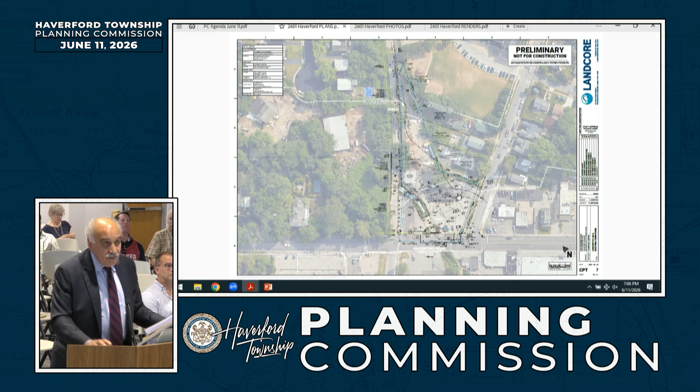First thing I'd like to show you are the pictures of the current property, and I'll take you through them real quick. That's the back. This building is coming down. All this equipment's being removed. The trailer's being removed - if anyone wants to buy one of the cars, if they're still there, they can. Most of these cars, I think some have been removed already, but you've got dumpsters, storage trailers, debris - this stuff from the current tenants. This is what we currently have in the back.

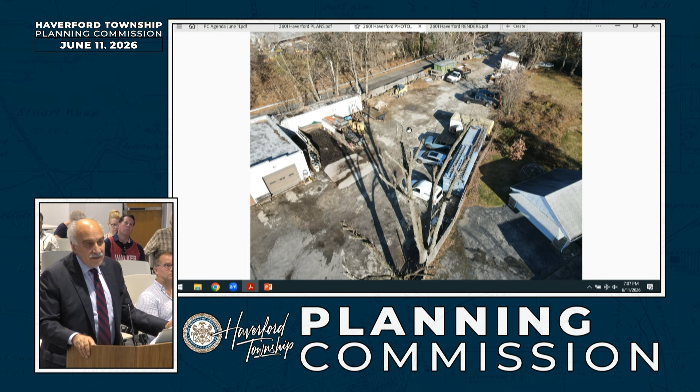More aerial pictures, and you'll see the irregularly shaped triangle - Alex will talk a little bit more about what we're going to be doing there. This is all going to be green. There's going to be trees, skip laurels, and grass. This is going to be a really nicely done up part of the tract. In fact, this client's going to be dedicating about a third of the property to open space. So contrary to what you see here, this is going to be beautiful, clear, nicely vegetated open space.

The improvements being made primarily consist of installing a permanent canopy, and I'm going to let Alex run through that. Right now there is a canopy that just sort of hangs there - I don't know if I had a picture of that. It's not a very secure canopy.

There you go, this is what we have there now. It's a temporary canopy, but it's going to be a permanent structure. It's primarily designed for the safety of the employees, shielding people from the sun glare.

It's an overall safety improvement. The directional flow of traffic on the lot is going to change, so it's a much safer approach to the car wash and exiting from it. There'll be less traffic backing up. It's a really good solution.

I'll let Alex do that. So let's talk a little bit about what we've done so far. We've gotten zoning relief from your zoning hearing board.

We are allowed to construct and develop in the floodplain, and to expand the non-conforming use, because that's currently a non-conforming use in the district. We're also permitted to have structures within the front yard setback area, primarily the vacuum cleaner stanchions that are going to be put there. So we did get zoning relief.

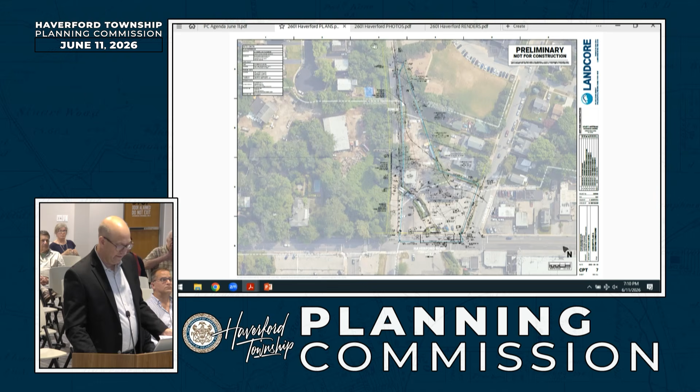Alex Tweedy with Landcore, civil engineer for the project. Just to clarify more on the circulation improvements, we can run through the site plan. Kirk gave a pretty good explanation, but really the business and building are staying almost the same size as today. There's a small addition to fill in one corner, but no new buildings being constructed. As noted, we're replacing the temporary canopy with a permanent one.

But the most important improvement from a traffic perspective is that currently you pull off Haverford Road and go right into the tunnel - there's only room for about one car to queue. The main purpose of this project is to flip the operation of the tunnel and allow on-site stacking and a formal pay station setup to happen.

So with the demolition of the landscape yard, this 0.4 acre triangle on the back of the site all goes to green, as opposed to all those debris piles, dumpsters, cars, etc. The building gets removed, and that opens up the opportunity for us to create a drive lane adjacent to the car wash building.

That allows cars to enter off Haverford, have room to queue on site, go through an automated pay station system which helps efficiency, and then we'd flip the direction of the tunnel. You'd go through the pay station, come through, enter, and exit immediately back onto Haverford. As Kirk noted, we got zoning approval to allow vacuum stanchions in the front yard.

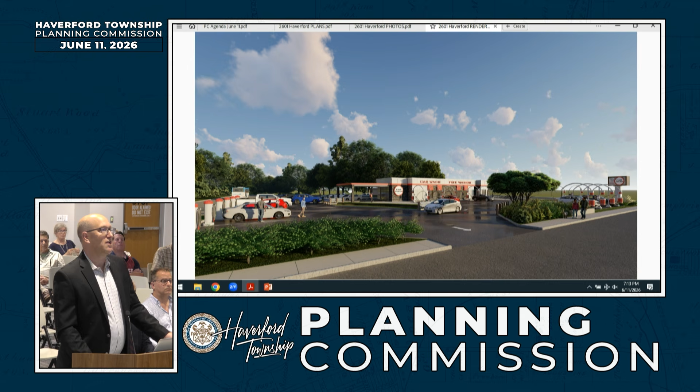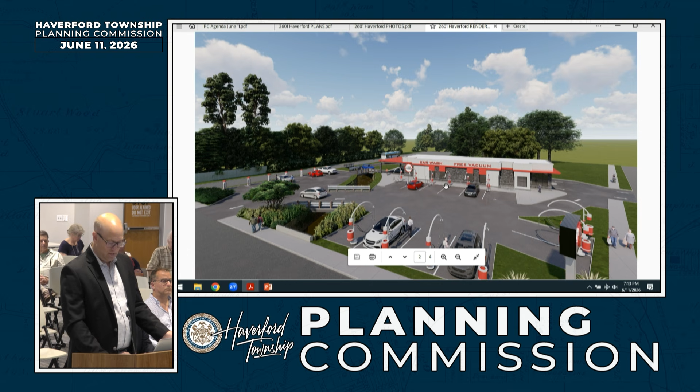So as I noted, you would now come in, drive behind the building, enter through this direction, drive back out towards Haverford, and either exit or travel to the vacuum stalls. And just some more pictures of what the site's going to look like.

So as noted, we have the review letter. Everything is a will comply except for a handful of items that are either somewhat narrative in nature, relate to a waiver, or relate to Shade Tree Commission approval. We are scheduled to attend later this month on June 22nd for the Shade Tree meeting, which will discuss a lot of these landscape features as well.

But there are some comments relating to buffering between the residential property and the car wash, and then some waivers as far as street trees.

If you're familiar with Haverford Road, it's paved right up to the back of the sidewalk. There's an existing gas main that runs right basically on the property line there. So one of our waivers is to not install those street trees, and what we're proposing is to still provide the correct number of street trees. We're just going to move everything to the back of the property into that green open space we're creating, because we can't install them along the street with the existing paving limits and the utilities that are there.

So in the letter, zoning comments 2, 3, and 5 all generally relate to landscaping items. Number 2 just talks about the buffer between parked cars, which would be the pay station lanes, and the residential property. We do have a line of skip laurels screening that. There is also a fence on that property that's going to be repaired and installed and cleaned up with a new fence. The skip laurels do stop short of the bend in that property line.

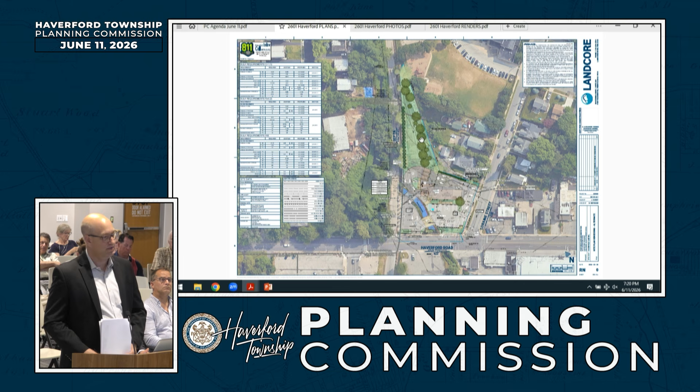So we're seeking a waiver from that SALDO section to allow us to do that work, subject to the approval of the FEMA letter of map revision, which will also be reviewed by your engineer.

Similarly, which I'll defer to Kirk and Peter for more discussion, on item 12, since this is over 1 acre of land, it triggers the township open space and park and rec requirements. Once again, this use is a redevelopment of an existing use. We're not adding a new use to the township. We're really just flipping the direction of travel and building some support structures. We don't believe that creates a new demand for park and recreation facilities in the township, and we would seek a waiver of the park and rec dedication.

On page 4, there are some comments on stormwater. I spoke with Chuck this morning, and we'll provide some clarification on our calculations. The 2 items that Chuck wanted to discuss tonight, or have us make plan revisions for, was number 19.

Car washes are deemed a hotspot, so they're looking for some additional water quality improvements for the runoff from that. What we talked about as an opportunity is there's an existing drainage system in the back of the car wash today that drains into Cobbs Creek, which runs through the site. We are maintaining that storm connection.

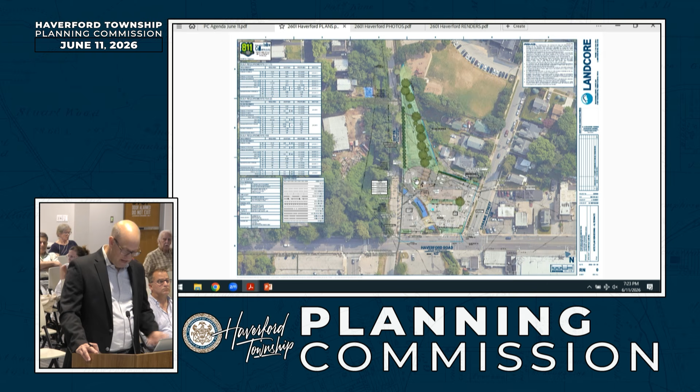The 100-foot limit does come a little bit into this green space area, so there will be some greening in the upper limits of that riparian buffer, up along the limit of the pay lane, but we are replacing a building structure with just a simple driveway. So we think that's a net benefit to the riparian area, but there is work within that buffer.

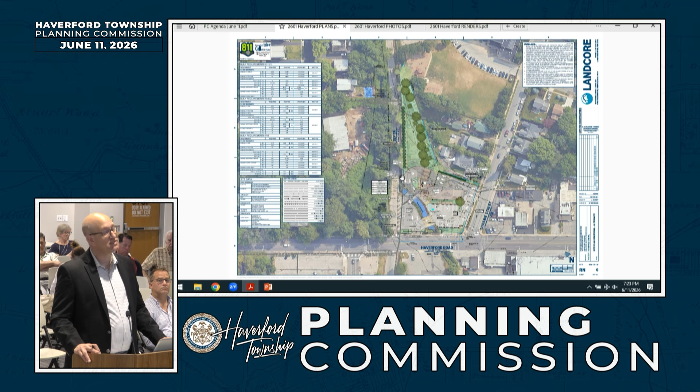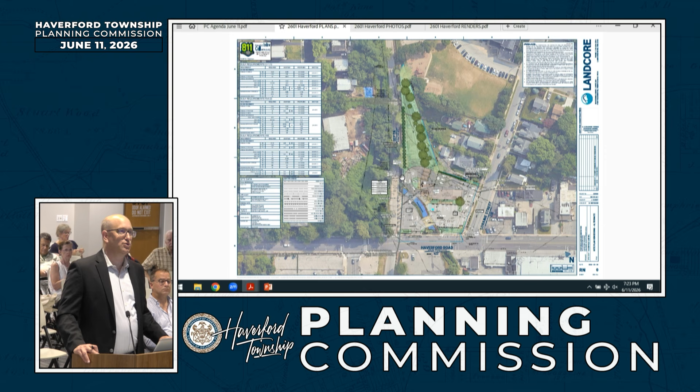As noted in the general section of the letter, there is demolition of that landscape building. The back wall is basically right along the SEPTA property line, so Chuck's just noting that we're adjacent to SEPTA. We are planning to do all the demolition from our side of the property. We will sit inside our property and demolish the building into our site, but we will provide notice to SEPTA at demolition time that we're taking that building down and that we're on the property line with SEPTA.

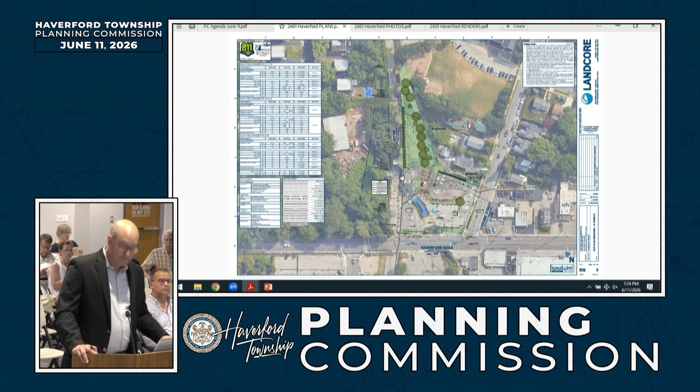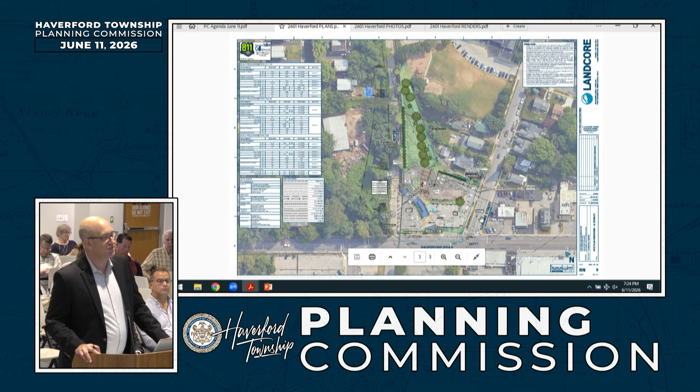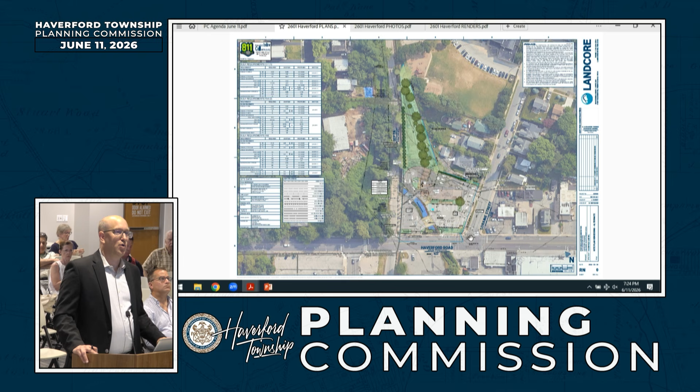24 is requesting an easement for light pole improvements at Haverford and Lorraine. We're not necessarily opposed to that provision, we just need more details on size and location. We do have an existing business sign at that corner, our pylon sign, the business identification sign is right on that corner as well, and we do have limited green space. So we'd just like to understand a little better what the township's thinking and make sure we can coordinate with our existing infrastructure, the limits of what you guys are asking for, and make sure there's no conflicts caused by that. But we would be willing to work with the township for more details on what they had in mind.

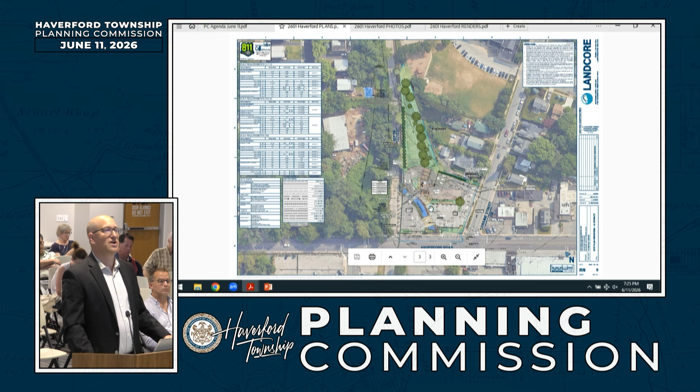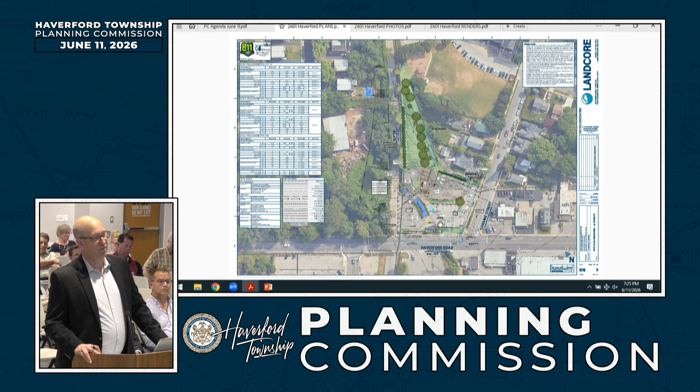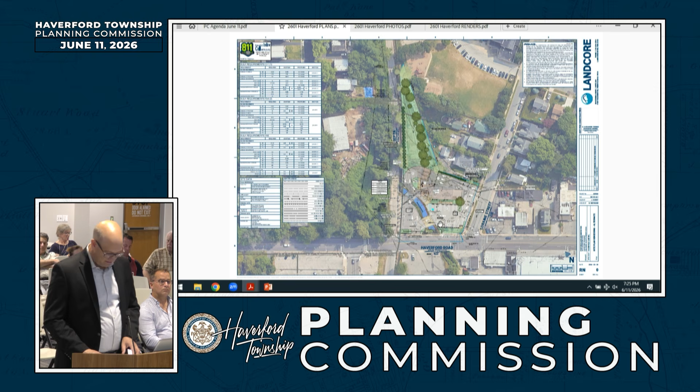27 talks about some operational issues. There is an existing dumpster adjacent to the car wash that we're maintaining in its location. Chuck noted that for the trash truck to access that dumpster, it does drive across some of the existing parking stalls. As noted, Peter lives right next door, he's an owner-operator of these facilities, he can manage all that operationally, but the trash will be coordinated to off-peak hours so those parking stalls are open enough to facilitate trash, and we can add a note to the plan to that effect. Other than those topics, we have some waivers I can review, but everything else in the letter would be a will comply.

So I don't know if we wanted to go through the waivers or if you had questions about the site and operation before we get into the waivers, or what's the best way to proceed? Well, thank you very much for the overview. I have a number of questions about site operation and design I'd like to go through, and I want to get a sense from my other planning commission members before we head into any waivers. So I think we'll do discussion first, Q&A, get some more information, and then we can go through the waivers.

I wanted to start off requesting clarification on some of the circulation you've discussed. It looks like there's going to be an open curb cut on Haverford Road along the western corner of the property. That's going to be closed, and it says a landscape planter. Is that proposed to be an above ground concrete planter, or are you excavating that out into an in-ground planting bed? We're open to either. There's an existing small planter there today, a landscape tie wall kind of planter, so we called it a planter because the original thought would be an extension of the existing planter. It's currently elevated, so we would look to build and extend that, but there's an option to keep it low. Whatever would be preferable, we could accommodate.

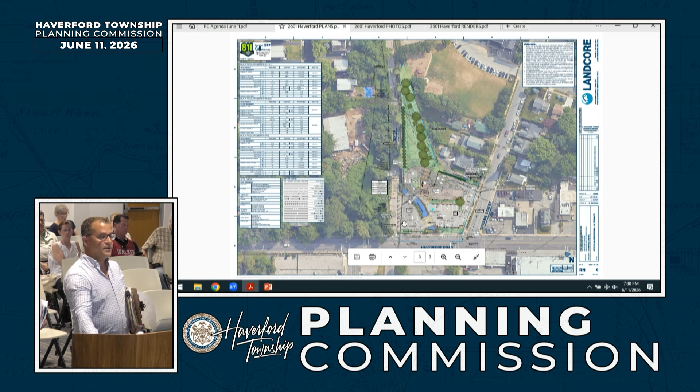That was my other question. So that upper bridge area, can we zoom in a little bit? That upper bridge area that enters into the coin vac area, that's going to be used by whom and how?

It'll be stanchioned off by traffic control devices and will only be used if a vehicle comes through. This will be attended as well with personnel. If trucks or vehicles enter the property that can't be washed, they will be directed off-site that way.

So it's like just an out valve? Exactly, an escape hatch. Yes, if somebody changes their mind or they don't have the right vehicle.

Thank you, that was very helpful. So then the ash trees, I understand you're trying to salvage them. I mean, ash in this region are so far gone, I feel like that is a losing battle. Not that I want to advocate for getting rid of trees, but if you can't save them, then they need to come down.

You can see in this picture, the former owner of the house was having branches fall on his vehicle consistently, so we cut all the dead growth back and injected them. Because they're older, mature trees, we didn't want to, but we didn't have to, and so far if you drive by, you can see they're growing nicely right now. So hopefully we nipped it in the bud.

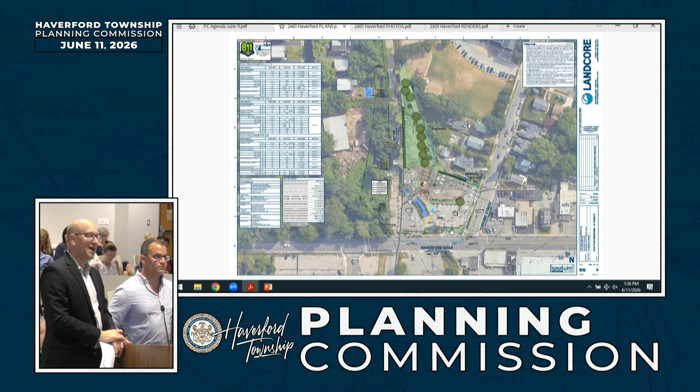We are concerned about, one, there being enough room to add any trees there, and two, sight lines from Loraine onto Haverford. The area where there's more green space, unfortunately, is closer to the intersection, which is worse for sightline obstruction. Sure, that's what I was going to say - that's part of our ordinance concern. That's why we proposed the right number, but we were adding them in the green space in the rear to not have any utility conflicts, sightline conflicts, signage conflicts, and vacuum stall conflicts. Okay, I do understand there's a number of constraints and limitations there.

I do think this is a missed opportunity if we aren't able to add some additional species-appropriate landscaping. I understand you might not have the space for a larger tree with conflicts with underground utilities, but it would be nice to have a more visual buffer. If we're going to green the space, it just turns into a weedy patch, and that doesn't do anybody any good. Exactly.

I think it would be a missed opportunity if we didn't look at some additional vegetation opportunities, some additional landscaping there. If a tree isn't suitable, just some low-lying shrubs that reach a height of 2 or 3 feet, so they don't obstruct motorists at the intersection, but meet whatever easements you have and soften that visual into the site. People will be vacuuming there, so it's also a nice buffer for a little more distance and separation from traveling vehicles on Haverford, since that gets to be a bit of a speedway. I think that would be a nice amenity to add, so I'd recommend taking a look at that.

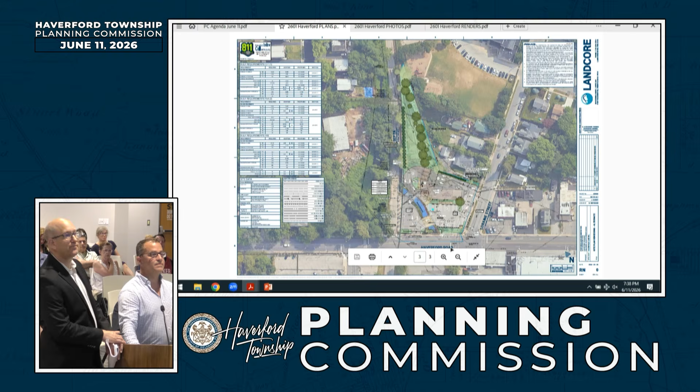As far as the width of that green space, these parking spaces would be 20 feet, so it looks like we have about 10 feet here. The right-of-way cuts across that angled line right there. So half the green space is not private property. And there's an elevation change of about 1.5 feet between the parking lot and the sidewalk, so we have to take that into account—maybe put a little knee wall, like a landscape wall with some plantings in front of it to dress it up.

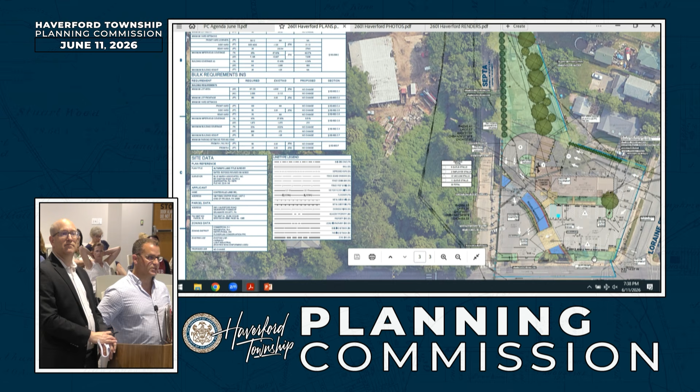Are you proposing to dedicate any additional right-of-way to the township? None is proposed on this plan. Is that something the township would seek additional dedication for? We'd have to talk about that further—there's probably not a lot of right-of-way there to start with. The biggest concern is the existing sign on the corner today. If we gave any right-of-way there, the existing sign would then be inside the right-of-way.

Is that a non-conforming sign? We didn't research it, but I'd assume it likely is. Was that not discussed at the zoning hearing board? We aren't proposing any changes to it, we're leaving it as is, so it wasn't discussed. Was there ever a determination as to whether it's existing non-conforming? Not as it relates to the signage. But you're saying you're not proposing to change it in any way? Just changing the panel colors, freshening up the face. Does the township consider changing the face a substantive change to the sign? No, a reface does not trigger that. Okay, that makes it easy.

I have a lot of questions, but we'll open it up soon. I had a question about the water treatment you were discussing. My understanding is that car washes in general are supposed to have closed loop systems—I'd appreciate some education on this since I don't know much about it. We were talking about two different things: site drainage, like rain runoff, versus the car wash water itself.

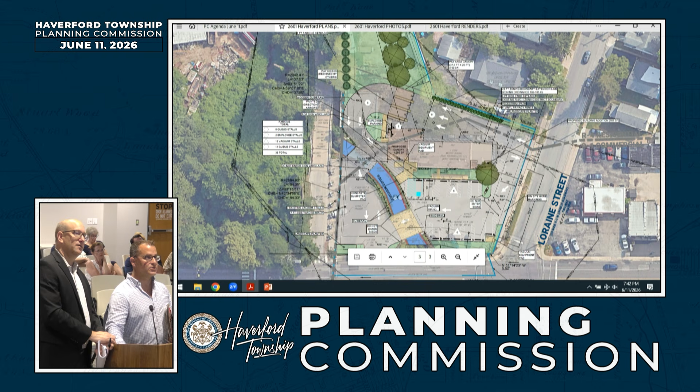With this upgrade, we also have these green zones along the creek where we don't have guardrails, so we'd like to enhance that, and when we do that we can extend and refresh these stone beds, which will also capture any runoff. Based on the existing condition photos, they're pretty weedy and look a little rough, so improvements there would be beneficial.

All the use from the 5 different tenants I have back here is not ideal for runoff into the stream, so just by eliminating those uses, it's going to significantly enhance the quality of the runoff.

Are you proposing any other stormwater measures on the site? It's plus or minus a 40% reduction in impervious surface with greening up that green space, so that is the stormwater benefit.

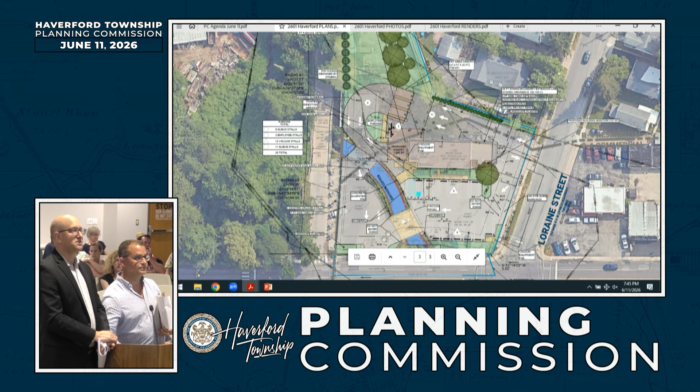We aren't really touching anything on the left side of the stream. There are some existing lights right here, and some existing lights on that side. But all our improvements are for the car wash side of the stream.

I think it would be beneficial if we could upgrade all of the lights to be full cutoff, to be in compliance with township regulations. All right, thanks Vic, that was all my questions.

I'm going to recuse myself from the discussion and vote for a professional conflict of interest.

Sure, I have a couple. Looking at the one rendering here, it looks like you're showing an existing fence along the creek which doesn't look very structural, but on this rendering there's no fence. Is that the intent? That's just an architectural rendering focused on the building, so they didn't work out those details.

As noted, I think you're looking to add some additional guard rail and fencing for protection on that. It doesn't exist today, correct. Right now it's just a post and rail.

I'm going to suggest that, I don't know if it's required or a safety issue, but every time you see a creek like that, it's a fall protection issue. Absolutely, it's liability for us as well, so we will do whatever the site plan needs. It shows the guard rails that are proposed, they just weren't picked up in the architectural rendering.

There was one of the plans showing the fire entrance, how they would come around and go over one of those bridges. Truck turning — are those things actually rated for a fire truck? Have they ever gone over them before? They're all existing conditions, so we can evaluate. Okay, just something to think about.

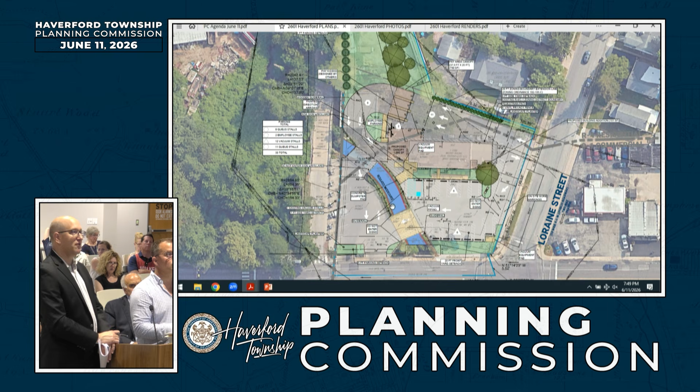All that water does still get to the stream, but now we're turning that into a landscaped green space, so that helps runoff and water quality substantially. The southern part of this property is currently a low-point paved area that sheet flows all of this south to Haverford Road and to the stream. So what Peter wants to do is clean these areas up, improve the grass coverage, add the guardrail, and a better vegetated cover there will also offer some filtering.

Gotcha. We'll have significantly less runoff coming from that area than currently, because it'll all be green. So it should hopefully capture that and reduce what's going on now.

I just have some questions about the traffic flow. So right now, cars from Haverford Ave enter directly from Haverford Ave? Correct, right through here. And they'll have to turn onto Loraine and then take a left into your facility. Correct. Have you considered traffic patterns during school drop-off and dismissal, and if trying to take that left when there's lots of school dismissal traffic, if that's going to back up into the intersection?

The traffic from the car wash backing up into Loraine? More like someone trying to take a left against a line of school cars trying to get back onto Haverford Road. No. I would assume your peaks are offset from school traffic, right?

Yeah, absolutely. What are your busiest car wash hours? Saturdays, Friday afternoons, Saturdays are the peaks. And as long as the people queuing to go south on Loraine at the light give a little bit of space, then the people should be able to come in.

I haven't seen it too much of a concern, but it would just be for pedestrian safety around those times as well, if students are walking home and people are trying to make a left and watching the cars and not the kids on the sidewalk. Right. Just maybe try and think through that.

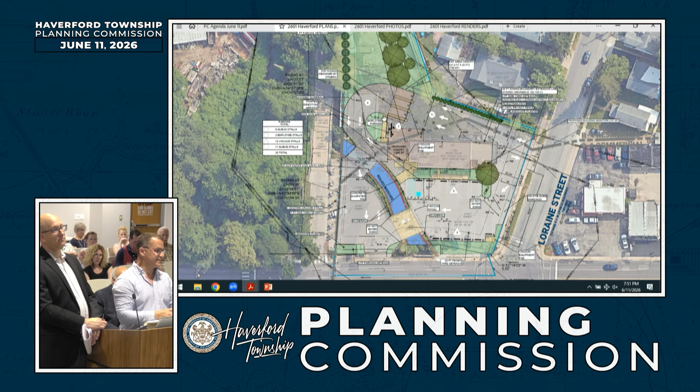So they time the lights, and sometimes people get stuck in between there as well. So we thought it was a net benefit to reduce some of that exit traffic on the entrance and exit on Haverford. If you're coming east on Haverford and trying to make a left in at rush hour, it's very questionable. So at least we'll be using that light for control. That's all my questions, thank you.

Just a couple questions, I'm going to focus on the Haverford Road side of it. The exit, as we're looking at this on the left - is that a left-hand turn or right-hand turn only in that area? It's full access right now. Full access to make a right or a left? Yeah, any movement is permitted at that traffic corner.

I was just thinking of backup, like someone making a left in a bit, you know what I mean? It won't be rush hour entering the site anymore. Yeah, they'll occasionally be exiting, but they can enter for the coin-operated access. Yeah, that's what I was - that was one concern that I had.

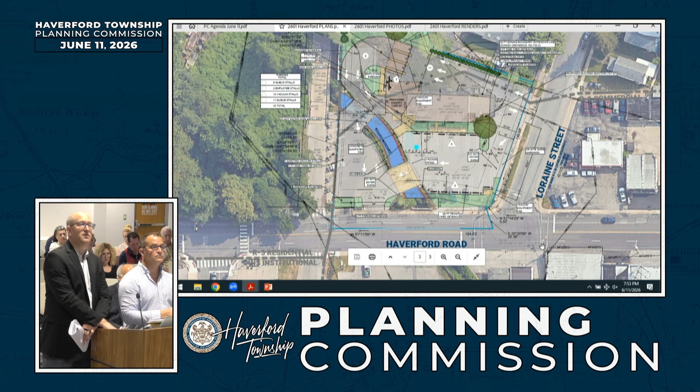And I saw we talked about the street lighting, or the facility lighting - is there any street lighting issues on that, Chuck? As far as, yeah, I looked today, there's currently a street light on Loraine. I believe it's this pole, there's a street light. There's an existing street light on this corner, and then a pole along this frontage and a pole further down. So on this general frontage, there's 3 street lights on poles along Haverford, and 1 existing street light along Loraine.

And we're not proposing to change anything for that. You're good with that, Chuck? I'm not aware of any lighting issues in that neighborhood, right.

One random question: is there a bus stop on the property or nearby? No, I think the bus stop is down further, over here near the busway, by where the bridge is. Okay, cool, just making sure.

There's a 7-Eleven nearby, so people gather there, especially at the exit. Last question I had was really more operational - looking at your diagrams, I'm thinking about kids with the hoses and the arches. I don't know if that's what you're envisioning, or is that standard equipment I'm talking about?

The vacuum stanchions here - what that does is it keeps the hose off of the ground, keeps them clean for the customers to use.

I get that, but do they move? I guess that's the question. In my head, I'm thinking what happens once somebody moves it around out into the street - does it swing the backwards arch onto itself? No, because they're fixed - this is what we call a clean out area. This is a fixed unit, it's like a pipe, just an arch pipe. Does it pivot? No. There's a soft hose that'll fit into the end right here and then swing back, and you hang it on the post itself.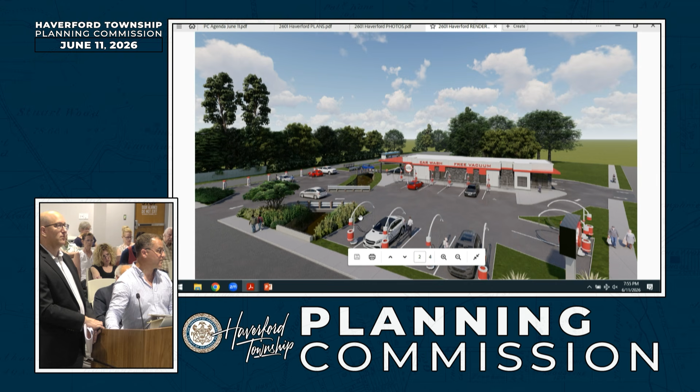And since these are free in the evenings, we take them off, so when we're closed they won't be hanging there at all. And there's really no way to pull them forward onto the sidewalk because that's the limit of the hose itself. I was more worried about the metal object pivoting or going out into the street. Okay, again, just an operational question, thinking worst case scenario. That's all the questions I have.

Right, thank you. Any other questions that came up as part of discussion that anybody wants to revisit on Planning Commission? Okay.

So you had stated earlier that everything in the township engineer's review letters will comply unless otherwise noted. Can we identify what the otherwise noted discussion points are from Chuck's letter? There's the waiver request, which we can go through. But the items we discussed relate more to shade tree feedback - the limits of the skip laurels, whether or not we extend underneath. The limit of the residential buffer extends into the root zone of the ash tree. So I think what Chuck is saying is that buffer planting should go to the limit of that property line. Identify what number that is in his letter for us to follow. Zoning 2.

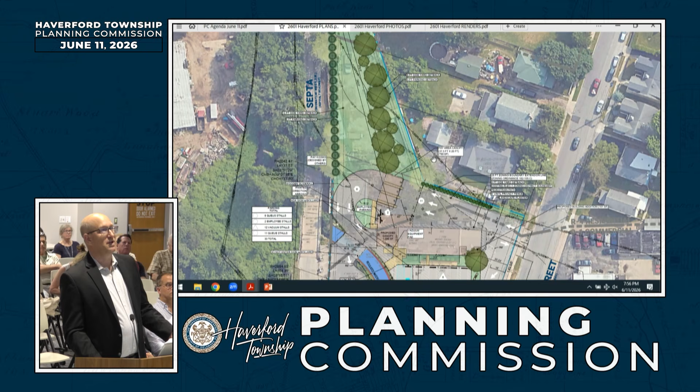So this is the alternate plan - there's one option where we add more skip laurels, but as you can see, this is the limit of the ash tree here, so we would have some trees underneath that. The current plan as submitted stops those skip laurels short so we're not disturbing it - we tend to assume the root zone is the drip line. So you see we stop them short, but this is the corner of the property. So there's a question of whether or not we extend those buffer shrubs all the way to the full limit, but that would put them within the root zone and drip line of the existing tree.

What I'd like to do too is replace the very decrepit post fence - it's a picket fence right now - with a nice maybe 6 or 8 foot Trex fence, which softens and dampens sound, and we can make it a real true buffer. Then we can dress it up with vegetation that won't impact the tree. Would the township permit an 8-foot fence? It has to be 6 foot max. Okay, 6 foot, got it.

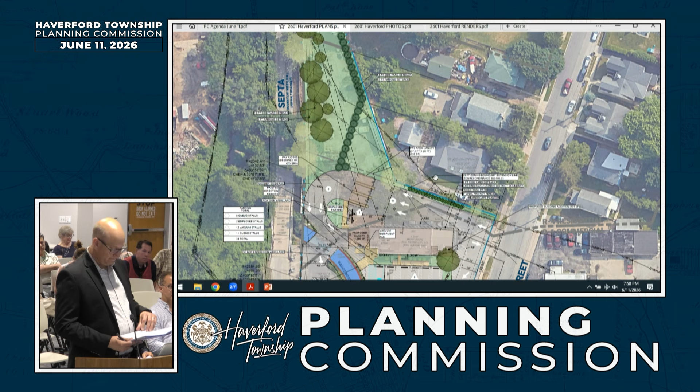And did you discuss this with the ZHB? No, the ZHB had a condition to landscape and buffer that during the land development process. So if the interpretation is the shrubs have to go all the way to comply with zoning, we'll do that - we're just concerned about working underneath the ash tree. But if code requires us to do that, we can do it. Other than the skip laurels, I guess whatever would be planted would have to meet the definition of what a buffer planting strip is - not less than 5 feet in width.

Does the township have a recommendation on this? No, it just has to comply with that code requirement. I think it's all in the definition of the buffer, the vegetative buffer. Yeah.

Typically, we don't get into anything more. We let Shade Tree also speak to some of it, but really, when it comes to that, it's just what's in the code. Since this is a zoning regulation and not a SALDO regulation, you would need to comply with this or go back to ZHB, and I don't think you want to do that for a couple of feet worth of buffer plantings. So I would recommend getting Shade Tree's input on what's the appropriate thing, but ultimately, I think you would need to come into compliance with that.

Yeah, we will comply. As you noted, it's zoning, so we don't really have an option. Right, okay.

3B was another one that we talked about. This one we believe is an existing nonconformity, that's the planting along Loraine Street. We're not adding those trees, and we're not changing the paving there. We're restriping it, but the paving limits stay the same. So, as we noted, we're providing the right number of trees, just alternate locations since we cannot plant them there.

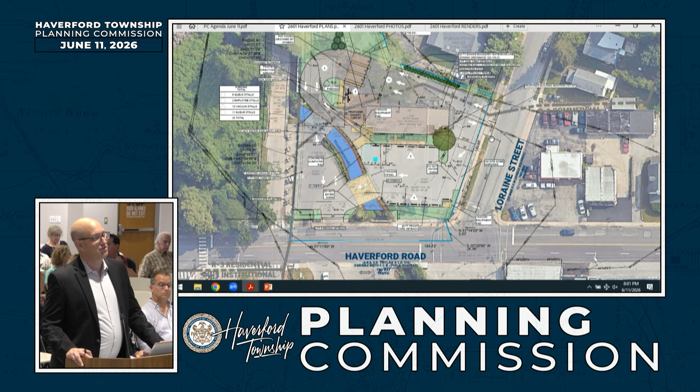And 21, we will add the riparian buffer limits to the plan, but we wanted to note that there are improvements proposed within that riparian buffer. So we were not sure, Chuck and I discussed if there was any formal approval needed, or since it's not a SALDO provision, so it's not a waiver, it's a stormwater code issue. So we didn't know if the planning commission or the township had to formally approve any type of disturbance within that riparian buffer.

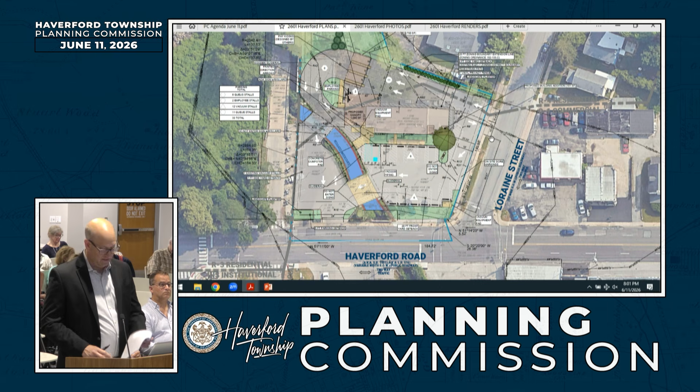And then general were just notes. We will agree to the operation of the dumpster, but that's a will comply. And then we noted that we'll notify SEPTA for the demolition of the landscape building. So it's really the riparian buffer, the hotspot change, and the landscape issues, and the open space.

And Chuck, do you have any comments you can share, your thoughts on the solution that they're proposing for the hotspot issue? Well, as you can see, it's mostly a paved area. There's not too many places you can put anything through there. So it seems like it's the logical best place to do that, being that they're creating that green area there and it's adjacent to an inlet. So that's why myself and Alex both thought that was probably the best location. You can look at some of these other areas adjacent to the parking lot, but it's tough to get anything there. It's on the upstream side, basically. So I think in this situation, it would be the best. It would be nice if it was bigger, but it is what it is.

Then the only other thing I'll add, which Pete noted, currently that area still operates as part of the car wash and the landscape yard, but you have all the runoff from that upstream triangle area flowing onto that pavement, picking up whatever's on that pavement, and then flowing into the stream. Now that that area is becoming grass, the run-on from that upstream area onto the car wash pavement, you're not dealing with nearly as much upstream flow. So it's easier to trap that stuff in that small green area. It would be much more efficient because it's dealing with a much lower volume of water since we're converting all that upstream area to grass.

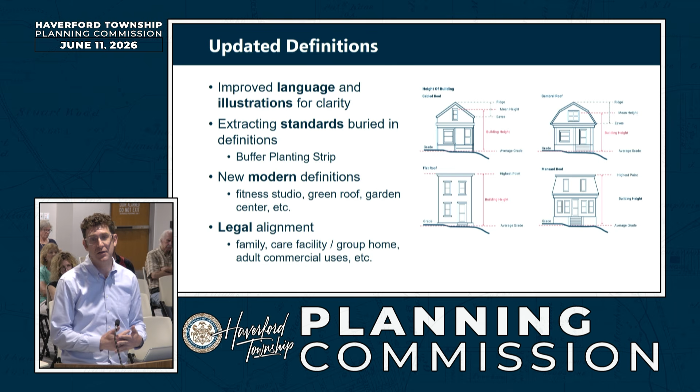One of the big things that has changed here is updated definitions. It's now easy for us to improve language and add illustrations for clarity. We've extracted all of the standards that were buried in definitions—it's sort of a bad practice to put certain requirements in definitions, but it creeps in sometimes. So we've taken them out and put them into the relevant section. We've put in a lot of new modern definitions—we've had a lot of conversation about this, everything from fitness studios to green roofs to garden centers—so that we all have a common language as we start talking about the substantive updates.

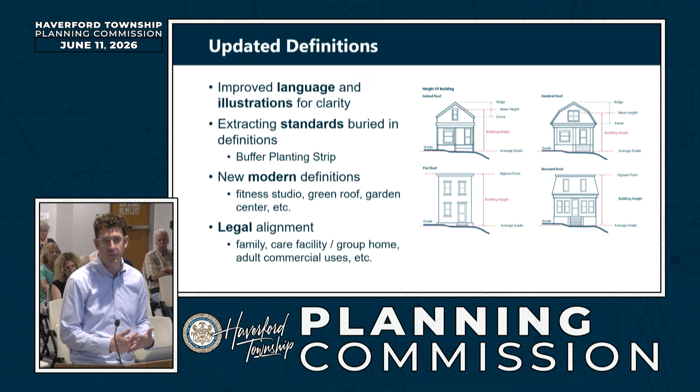And most importantly, we have brought the ordinance up to a legal standard, because you're going to go through an adoption process here. We don't think it would be responsible for you to essentially use definitions that would put you at risk. So things like family, care facility, group home, and adult commercial uses have all been updated to bring you up to state standards. One of the big things you will see here that is new and different are the use tables.